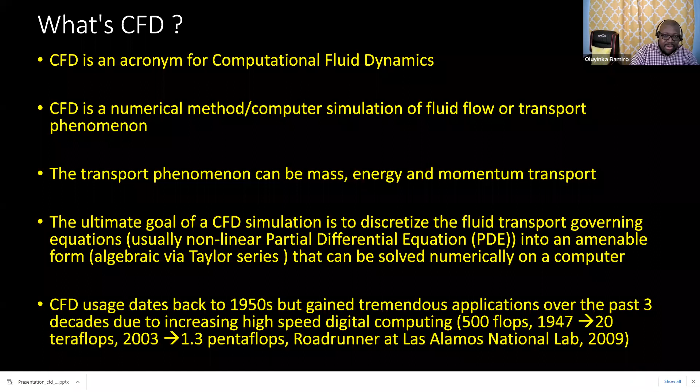So going to the fundamentals of CFD as a whole, basically there are 2 approaches to modeling fluid models. There's what they call a molecular approach, and there's what they call a continuum approach. In a molecular approach, the mean free path, what they mean by mean free path is the distance of collision between particles, is comparable to the length scale of the geometry you're interested in.

And in cases like that is when you look at flows in microchannels. Like, for example, if you look at printers, most of the ink flows are in microchannels. So in those cases, you most likely are going to use a molecular approach if it goes to that level, because at that level, what we call the continuum hypothesis or the continuum models breaks down.

But just to break it down, in this talk I'll be talking about the continuum model with regards to the Navier-Stokes equation. The Euler equation is just a derivative of the Navier-Stokes equation. Looking at the Navier-Stokes equation, in simple terms you can say it's a conservation of your mass, conservation of your momentum, second Newton's law, F equals ma, but in an elegant fashion, that's the second set of equations. The third one, you can say energy can neither be created nor destroyed, conservation of energy. You have this third partial differential equation.

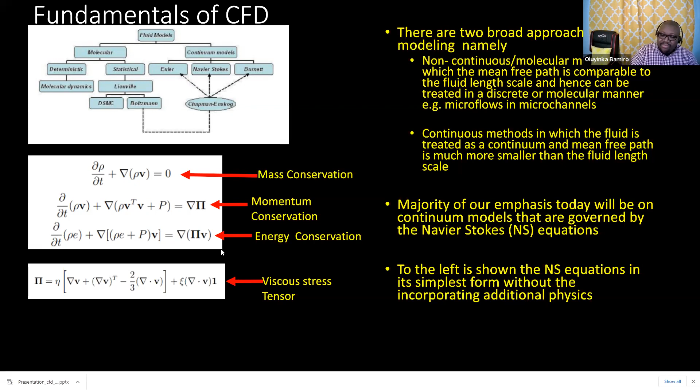Later on, I'll talk about what additional physics or complexity you can add to these equations and how you solve them. Now, going to the typical physics, like I mentioned earlier on, with regards to trying to solve your Navier-Stokes or computational fluid dynamics, this is by no means exhaustive. There are still many underlying physics that you can capture and solve. Later on, I'll begin to show you what this means, the practical applications. So in terms of heat transfer, it can handle conduction, convection, radiation, either separately or all combined, all happening at the same time. For radiation, it can be in a non-participating media or a participating media.

What do I mean by participating media? A participating media is a media that absorbs radiation, reflects radiation, scatters radiation. An example from my previous work is when you look at glass. When you melt glass, it reflects...

And then here I'm just showing different ways of modeling it depending on how optically thick the glass is, just different approximations.

And if you could remember from our basic fluid mechanics, we have laminar, we have turbulence, you can handle that. And under turbulence, it can be what they call RANS, Reynolds Averaged Navier-Stokes. It can be LES, Large Eddy Simulation, or what they call DNS. This is typically of little interest in industrial applications because it's computationally expensive to do.

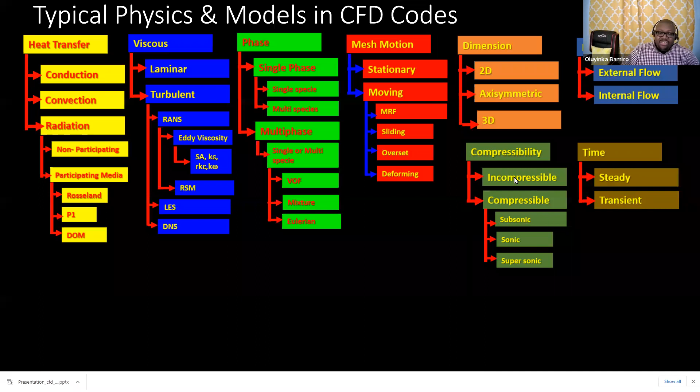And then in terms of time, you can solve a steady state solution - you're interested in the long-term perspective of the flow field, as opposed to just how things evolve with time. If you are interested in how things evolve with time, you look at a transient simulation.

Moving on to advantages of CFD as a whole, why CFD has a very good advantage over experimental methods: it allows for what I call design synthesis and optimization in a very cost-effective manner.

This means that before you even build a single prototype, you can run through different design alternatives and optimize the design to get the most cost-efficient design before you even produce it. But if you were to do that experimentally, you'd first have to build the prototype, run the design of experiments, and then see which one is your best design.

But all of this you can do virtually via CFD and come up with the optimum design, and in certain cases run your design of experiments, get response surfaces, and even take it into other models and so on.

Another area it's very useful is if you're interested in looking at your flow field, trying to see how things flow, it's very easy to visualize. As they typically say, a picture or a movie says more than a thousand words can say. So it's great for visualization.

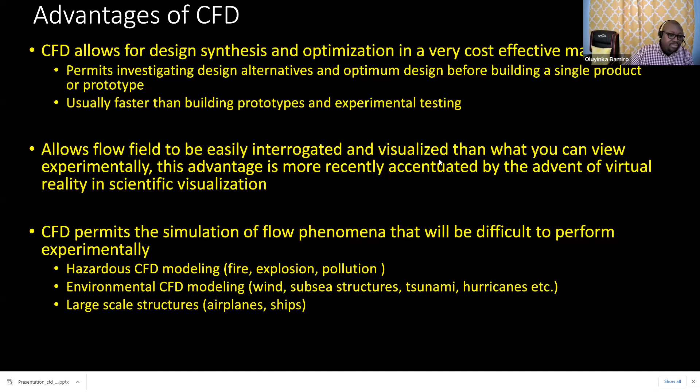Now I'll give some typical industrial applications of CFD, and by no means is this exhaustive - the application is wide, so I'll just go through some of it.

In the automotive industry, people use it for drag coefficient, since your drag coefficient affects your fuel economy. People look at cabin comfort - how the HVAC spreads uniformly once you put on the AC within your car. People also look at engine combustion and the overall thermal management of your car to make sure everything is at the right temperature.

In aerospace, it's almost similar to the automotive industry: drag and lift, airfoil design, cabin comfort.

In the biomedical device industry, they use it for all sorts of biomedical devices - as long as fluid flows through them, it can be simulated to optimize the design, such as flows in blood vessels and the heart.

In power and energy: turbine design, cooling towers, combustion, burner design, etc.

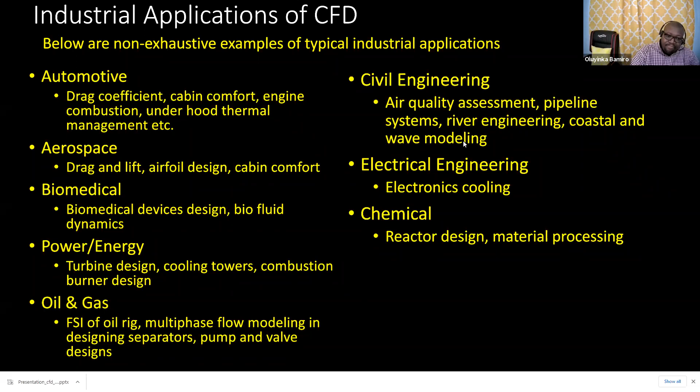Moving on to the stages of a CFD simulation. Like I mentioned earlier, there's what they call a pre-processing stage, where you're basically trying to clean up. Somebody's going to give you a CAD geometry. Let's say, for example, on the car here, one of the demos I'll show, they give you this 1964 Aston Martin DB5, and they want to calculate the drag coefficient on it.

So once you're given this geometry, most geometries of industrial relevance are usually complex. From a CFD analyst's point of view, we always say it's not watertight. Typically, if you're trying to solve something, particularly for internal flows, you want to make sure it doesn't leak, that it's watertight. So you go through the process of cleaning up the geometry. In terms of the CFD analyst's time, most of it is spent at this stage trying to get it ready to be simulation-ready.

The CAD geometry can be received in native format, like if you work with SolidWorks, NX, CATIA, or Autodesk, it can be in their native format. It can also be in a neutral format, like STEP, IGS, Parasolid, or in tessellated formats, and so on and so forth.

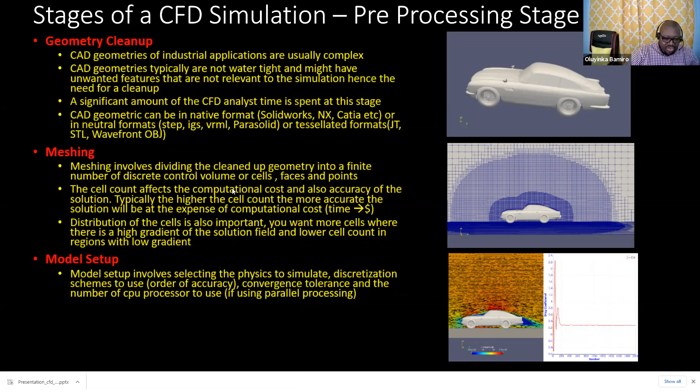Then moving on to the solution stage, it's pretty much simple. Just submit the job to your compute server, on which you're going to run the job. And usually in most industrial applications, you typically use parallel processing, use supercomputers, or more recently, people have started using GPUs, graphics processing units, to speed up the simulation.

The analyst time is barely minimal here, but where most of the cost is induced at this stage is basically your infrastructure cost, in terms of do you rent a compute server, or do you have an in-house compute server, or things like that. That's where most of the cost is, more infrastructural cost.

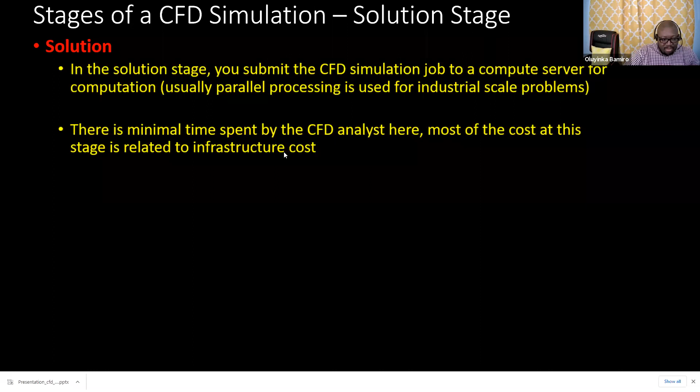And then the post-processing stage typically involves analyzing the results that you've generated into some meaningful data sets, in which you make a value-based engineering decision. We typically don't just run CFD analysis for running sake. You want to answer questions from an industrial perspective, usually to either design safer products or to have cost-effective products. Like engineers, we solve problems. So CFD in itself is trying to solve a problem, answer a question.

And that's why I always talk about value-based engineering. It must bring value in terms of the product delivery or in terms of costs. That's at the end of the day. This typically involves generating contour plots, animation movies, graphs, and reports. And like I mentioned earlier, trying to make those solid value-based decisions based on your analysis involves good engineering judgment by the analyst.

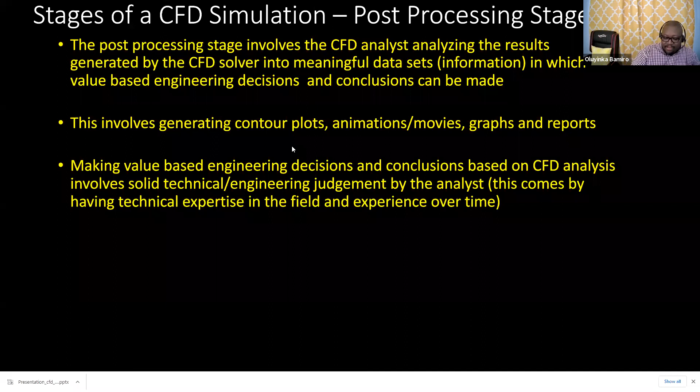But more recently, there have been some game changers, at least on the solver side, like OpenFOAM, which is what I'll be showing today. That's why I see value and potential for people adopting it, particularly in the developing world, in cases like Nigeria, where the cost of ownership of some of this is very expensive. But they have solvers that are good enough to do what this does. The only downside of open source is that the learning curve is very, very steep. It takes a long while to get a handle of things for open source versions.

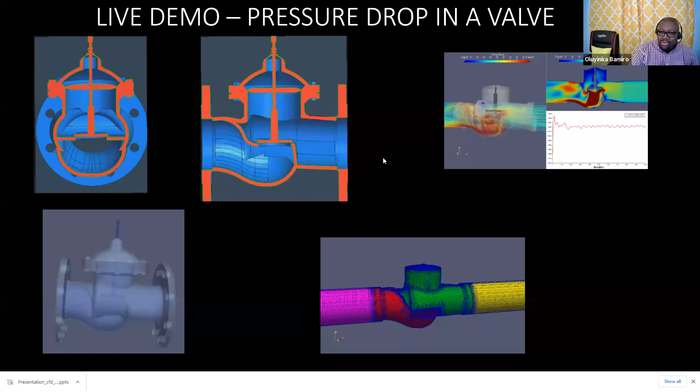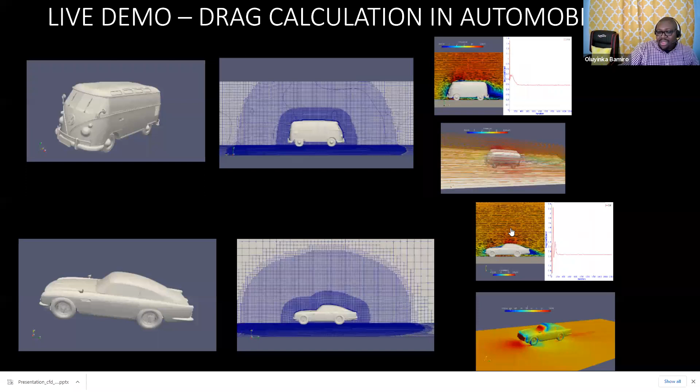Moving on to the second one, this is an example of a Volkswagen bus where I calculated the drag coefficients, and similarly for an Aston Martin, comparing its drag coefficient to that of the Volkswagen bus. The other one has to do with a transient simulation.

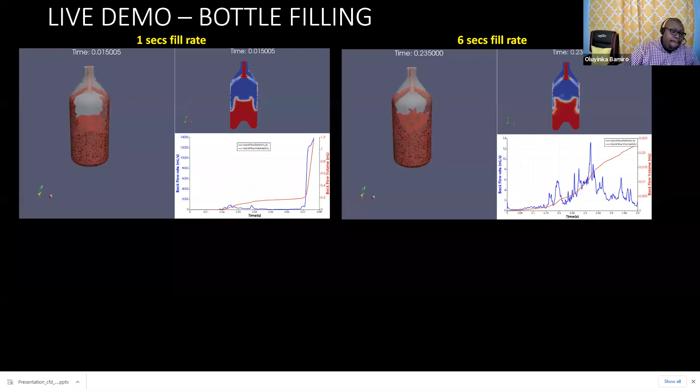It shows a bottle filling. Typically in a bottling plant, time means money, and you want to fill the bottle as fast as you can without whatever you're filling coming out. So you're looking at a 1 second fill rate, a 6 second fill rate, and the amount of backflow you get.

So I'll show that, and then I think that should be it. Hello, am I still on track? Yes, very much, yes. Go on. Okay, so like I mentioned earlier on, please go on.

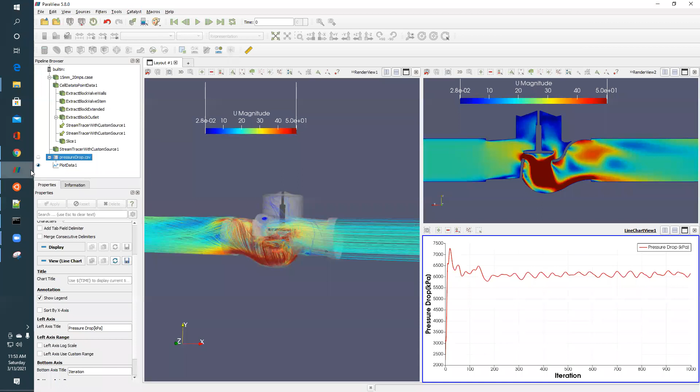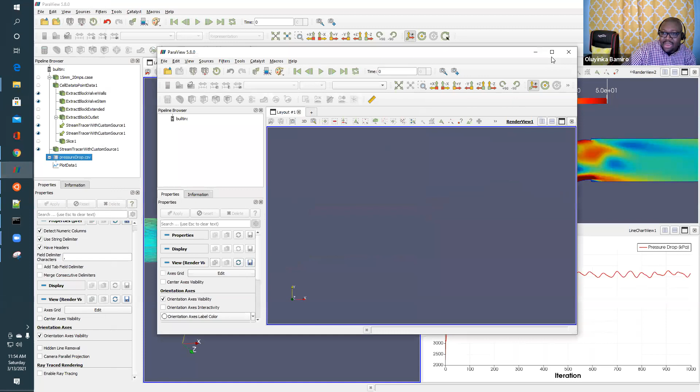Okay, like I mentioned earlier on, this is a case where you are looking at a valve, and you are interested in determining, as you solve iteratively, what your pressure drop is going to be. In typical applications, to start out with, you are given the geometry. Let me load it.

Let me open something. By the way, for this case I was using OpenFOAM — it's open source and freely available. So in this case I created the geometry, which, like I mentioned earlier, is in STL format. Let me load it in just to show you the geometry.

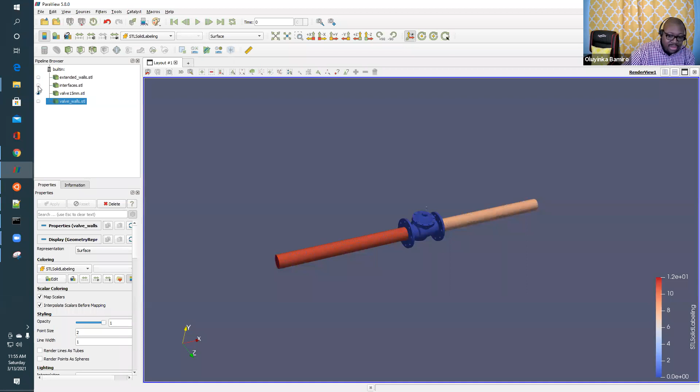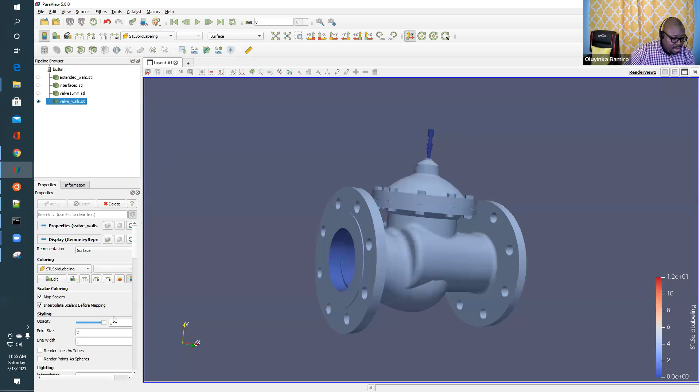So this shows the valve. Let me switch off the extended walls. You are given a valve like this, and the flow direction is from my right to my left. Let me reduce the opacity here, and the flow is going to go in here depending on the valve position.

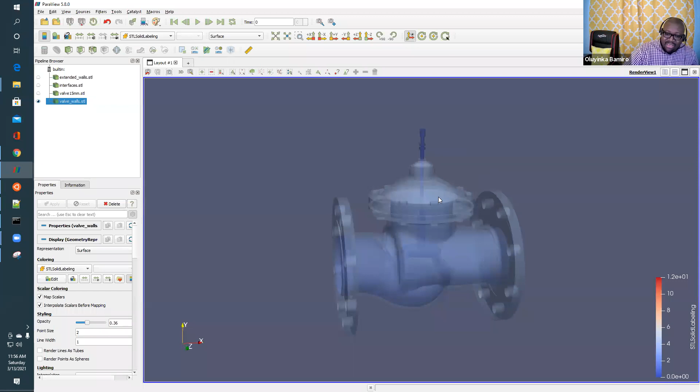You are going to have different levels of restriction, so you can generate your pressure drop curve for different valve opening positions. This one was at 15 mm from the seats. When you try to solve something like this, like how you would do it experimentally, you're going to have what they call an entrance length.

You extend it — you have your flow coming here. You don't just start the flow here because you want it to be fully developed, like it would be, for example, in an oil pipeline. So I extended the domain upstream of it, and then downstream of it.

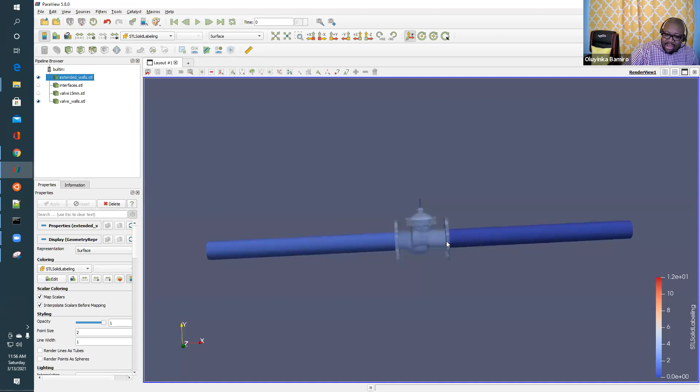In my analysis, I look at the total pressure downstream — you surface average the total pressure, and the difference gives you your pressure drop at different flow rates. By total pressure I mean both the static pressure, the hydrodynamic pressure, and also the pressure due to height changes. After that, you mesh it.

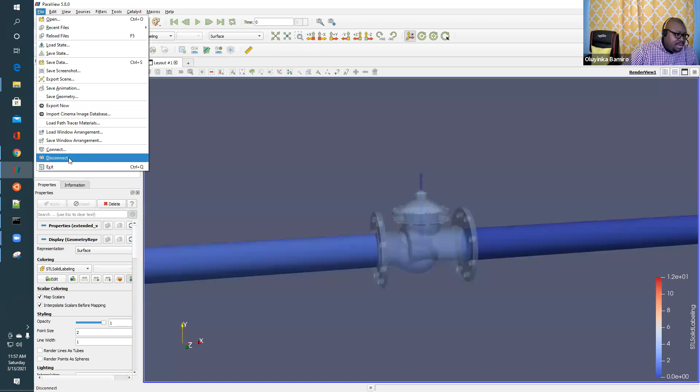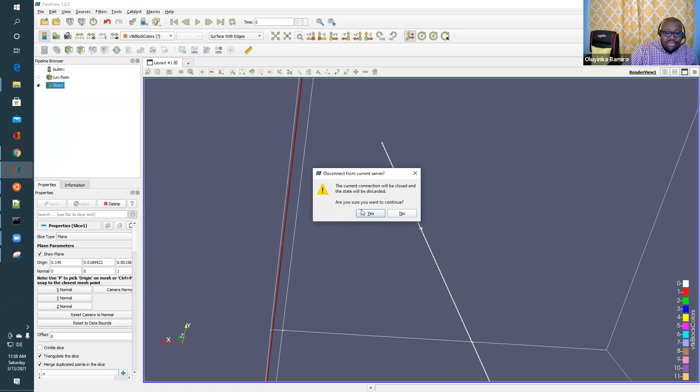So let me show you an example of how a mesh will look like. Let me disconnect this and see whether I have a state saved. Okay, I don't think I have a state saved. Just a minute, let me try to load the mesh.

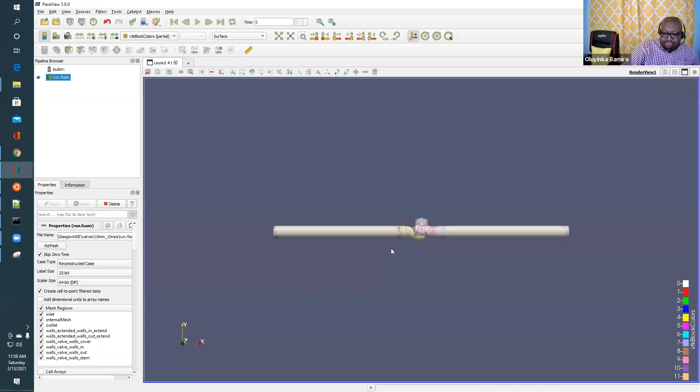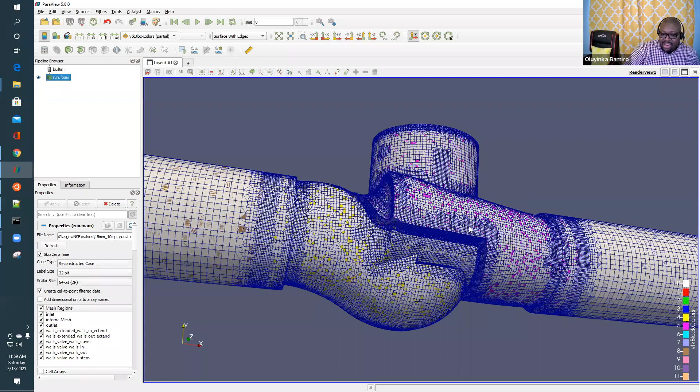So after doing that geometry, this is what your typical mesh will be, discretizing it into cells like I mentioned earlier. Typically you are interested in the regions that interface with the liquid, so as shown here, it shows the regions that are actually in contact with the fluid region.

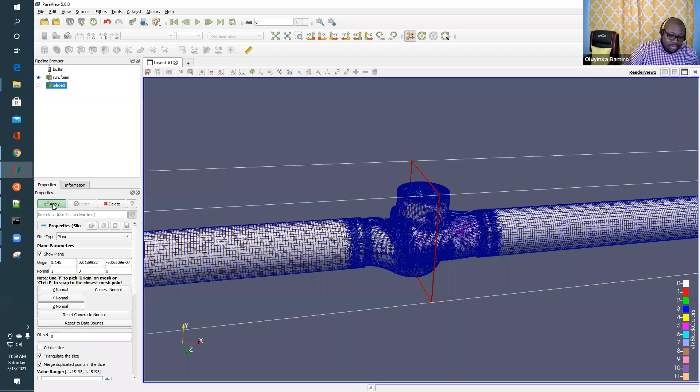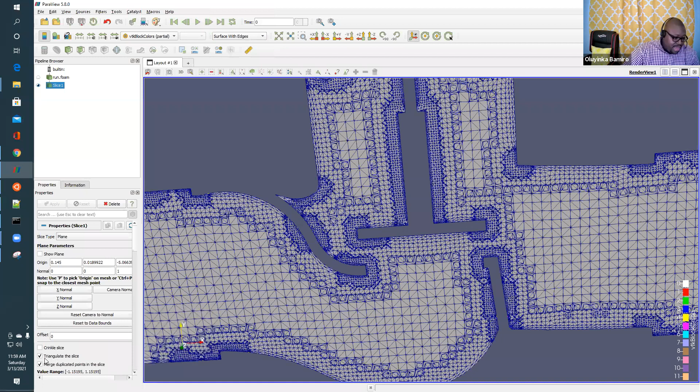If I take a section cut of the mesh — just a minute, so my Z normal — this gives you a section cut, and you can get an idea of how the mesh looks like and how the meshing operation works.

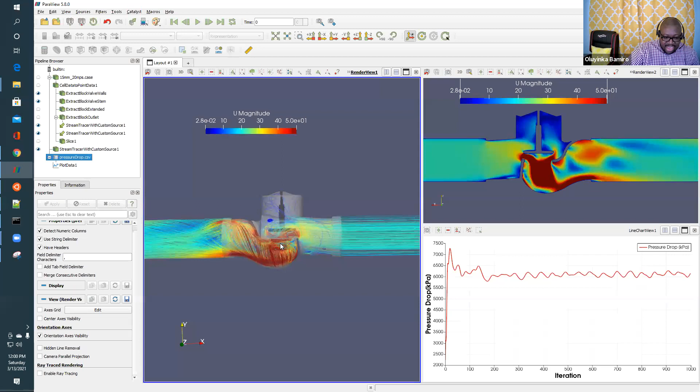Then when you go to the result phase, what I'm looking at here is the streamlines, how the flow goes under the seat, showing that because of the gap here you have high velocity regions coming up and going there.

On the right here is a section cut at mid-plane, showing the flow in the valve. It's not shown here, but it's cut such a way that you won't see it. It comes this way and then goes underneath and then goes out.

And then here is what I look at, my pressure drop. Typically you can use this as a convergence criteria. You run it long enough that you feel it's stabilized, and then you can take your pressure drop as the solver iteration continues. This is a very huge amount of pressure drop because there's a huge amount of flow going there.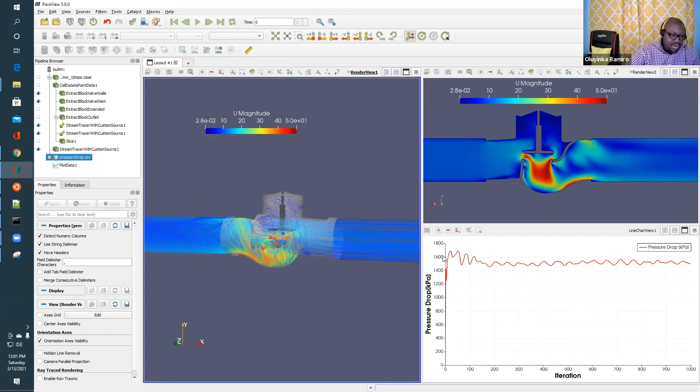Similarly, without being redundant, the initial one I was showing was roughly 20 meters per second flow velocity going in from the inlet, and now I reduced it to 10 meters per second. You see the pressure drop is like 1600 compared to my initial one, which was 6500. And here, if you look at it, I reduced it to 5 meters per second.

You see the pressure drop is way much lower. So definitely, as you'd expect from a physical and intuitive point of view, the more flow rate you put through, the more your pressure drop, and from a practical aspect, the more it's going to cost you in terms of the type of pump you'll need to overcome that pressure drop. So if you look at it in terms of pipeline engineering, that's how you come up at times with sizing of

pumps, or is there a way that we can better optimize this valve so that we can get a certain flow rate for that design. Those are kind of design considerations you take into cognizance when you do things like that.

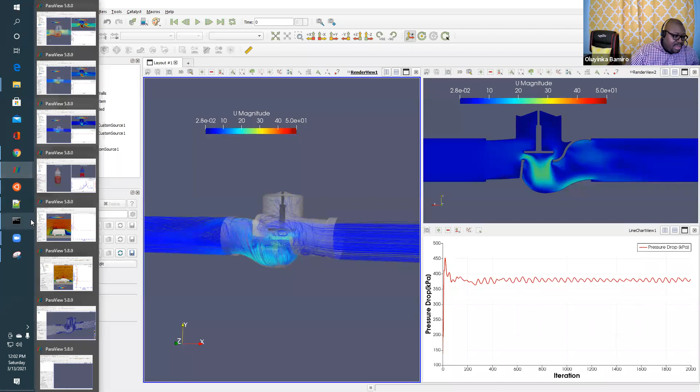Moving on to the next one that I'll talk about has to do with, let's say for example, looking at a bus like this. Why drag coefficient? Because drag coefficient typically affects your fuel consumption. So typically you set up a model like this.

Let me show you what you typically get. What you typically get, maybe you get a geometry. Let me go to my constant. You get a geometry like this, and then while it loads, okay.

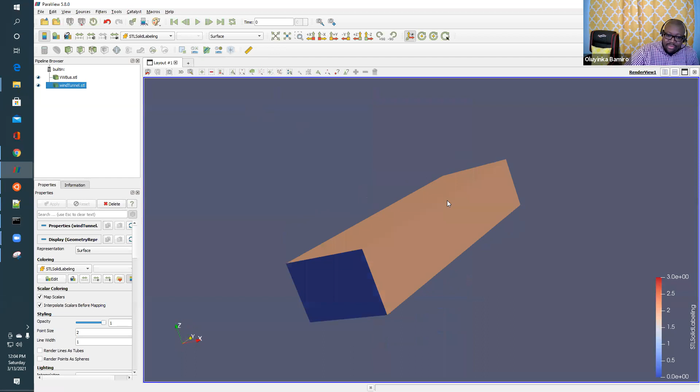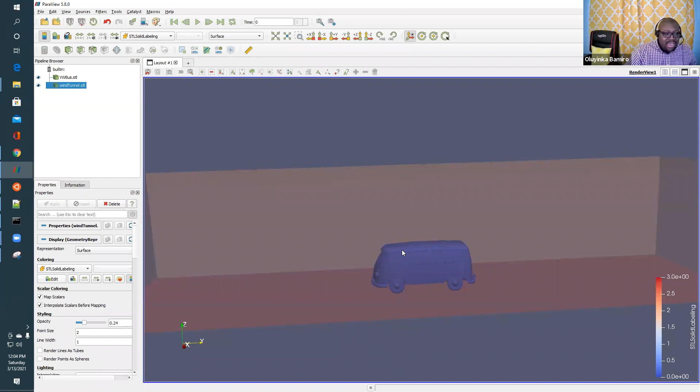So here you get a geometry like the bus, or it can be any car of interest that you're trying to do, and this by no means is limited to just cars only. For example, even in sports, people look at design of golf balls, it's basically the same principle. People look at swimmers, when people design swimsuits and all those other things, it's still the same underlying physics. You're trying to calculate drag coefficient there. The application is limited in certain cases only by your imagination, so there's a lot of areas you can apply this.

But for the context I'm presenting here, you're looking at a bus and trying to calculate the drag on it. Typically, the bus is moving at a certain speed. From a CFD perspective, you don't just move it at that speed - you can try and move it at a corresponding speed, but you still get the same results by keeping it still and assuming there's a flow going over it.

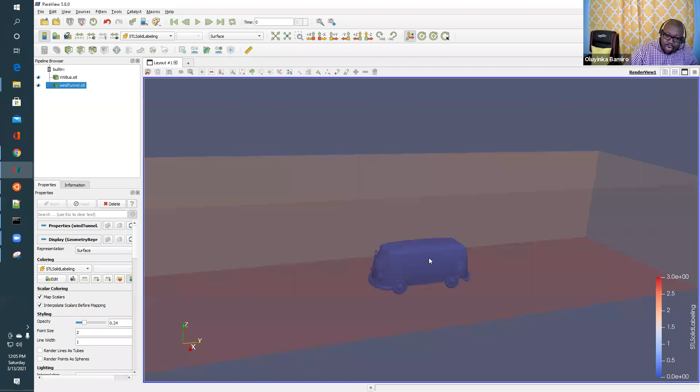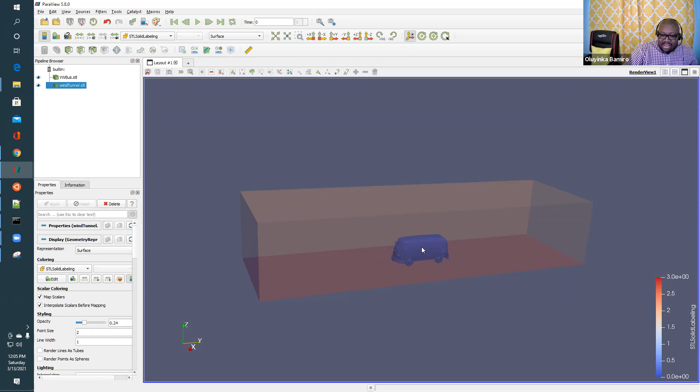And that's what I've typically done here. In most applications, you put it in what they call a wind tunnel, and then you send in flow at a certain speed and calculate the drag coefficient. Basically, that drag coefficient at the end of the day relates to the friction force, and that loss affects gas mileage and so on. In terms of physics, it's just an external airflow. If you're interested in internal airflow, there are cases where you look at cabin comfort within the car, like I mentioned earlier on.

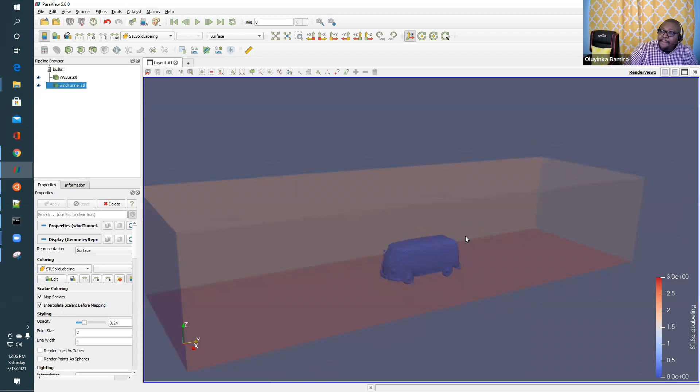So this shows you the geometry. I have a wind tunnel and so on and so forth. Then you follow the same procedure like I mentioned earlier on. At the end of the day, mesh it, look at the mesh, like I showed in my presentation here, just a minute.

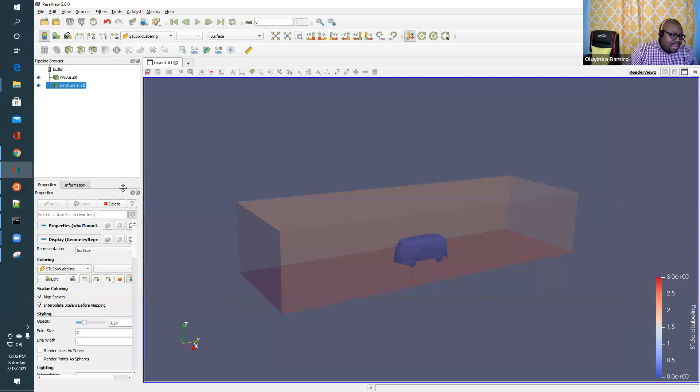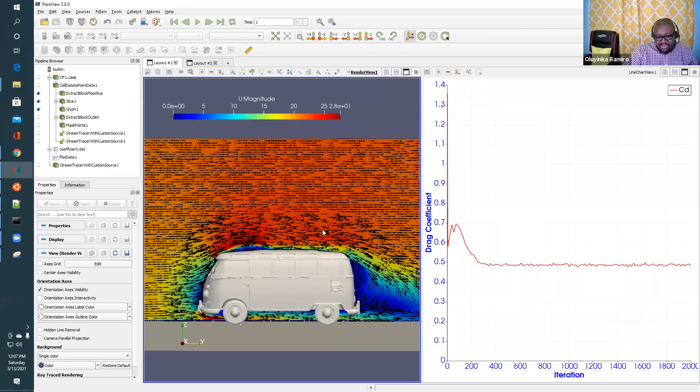When you look at the mesh here, this region is well refined, well distributed. As I move further out, the distribution reduces. At the end of the day, you look at the drag coefficient - the higher the drag coefficient, the more friction forces, the more gas mileage will be affected. So looking at this bus, the drag coefficient is roughly around 0.48.

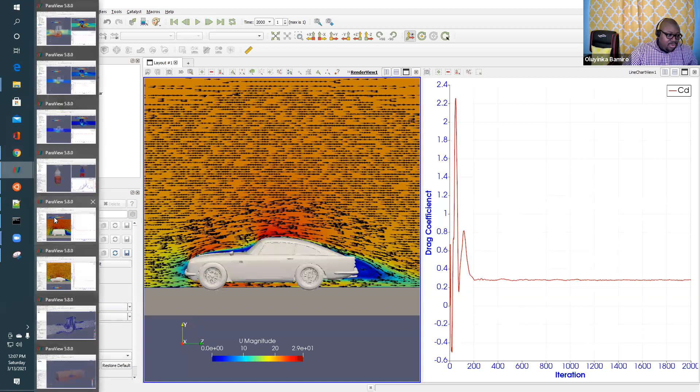If you compare that to the sports car I was showing, like the Aston Martin, the drag coefficient for that was roughly around 0.29. So you can see, because the body of the Aston Martin is shaped such that there is less drag, it's contoured, it's streamlined.

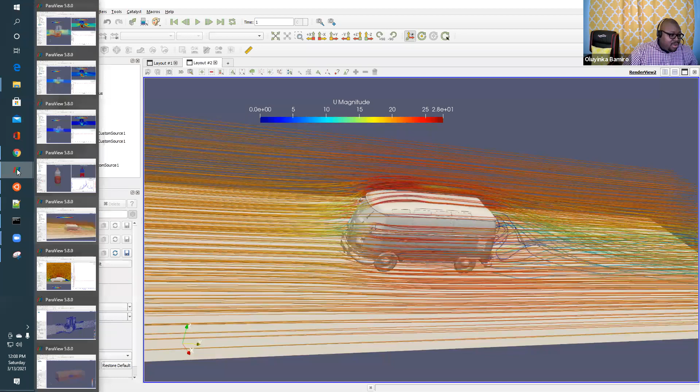That leads to less drag, as opposed to when you compare it to something like this, where you have a lot of surface area for the flow to hit, a lot of drag. Then we can look at things like streamlines, the recirculating flow, and all sorts of things you can do. Moving on to one more application, like I mentioned earlier.

The application here is, let's say, in a bottling plant, where they want to see how fast they can fill, because how fast you can fill determines your job rates and how many bottles you can fill. The faster you can fill, the more cost efficient you are.

So basically you're trying to push the limit. Can I fill this bottle, like a wine bottle, within a second? If I can't fill it in a second, can I fill it in 2? Can I fill it in 3? So you look at different designs, like when I started with this, even different designs of these nozzles, all sorts of things you can do with that.

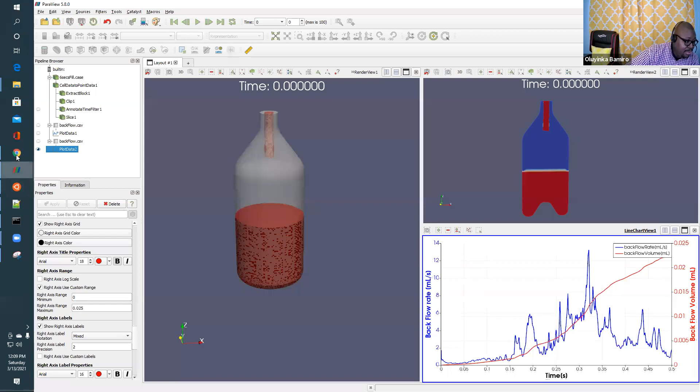On this axis here, we show you how much backflow you have, in terms of how much of it is going out in total as you fill. Here the blue shows you the flow rate, the instantaneous flow rate. There are different applications of this in different industries, not just limited to bottle filling.

In this bottle filling example, if I show you the animation here, on the left-hand side they're trying to fill as fast as they can. This is roughly around 740 ml, trying to fill it within 1 second. As you can see, once you start filling, because of the air entrainment, it circulates up, and then everything spills out, almost 1.2 ml, within a very short period of time.

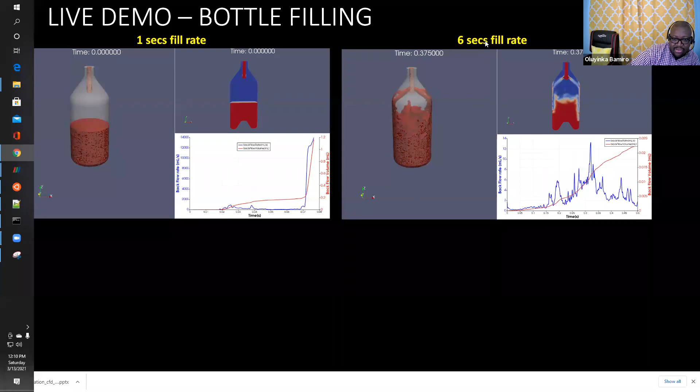If you try and reduce the fill rate in this case to roughly 6 seconds, it shows you a normal fill rate, filling normally, even up to 0.5 seconds, and still no backflow.

This basically can drive a lot of solution strategies. Even in this case, you're assuming a constant fill rate, but you can do a control system whereby you use variable fill rates. Maybe once the level is here, you fill at a certain flow rate, and as it's coming up, you reduce your flow rate. So all the kind of design decisions you can make based on the power of using CFD.

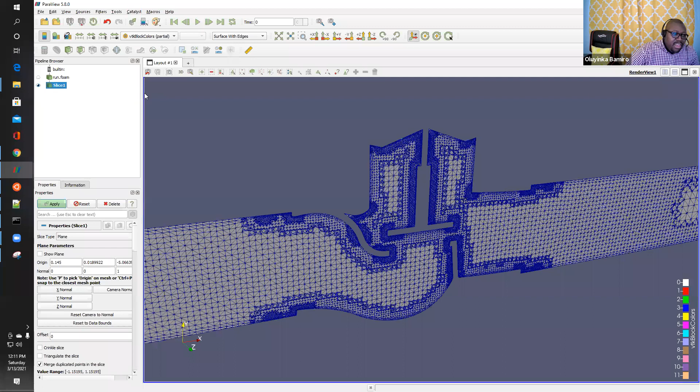One more area, just before I go back to the presentation, that I want to share is in the area of HVAC design. Let me disconnect this.

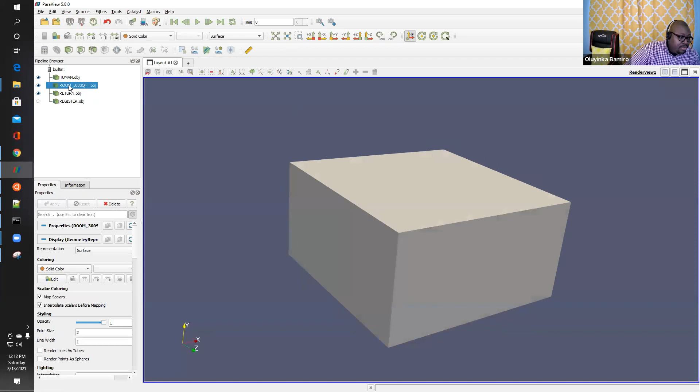This one typically shows you what people can do in terms of HVAC design. Take, for example, you are in a room, trying to design a central air conditioning system. This one I don't have the results for yet, but I'm working on that.

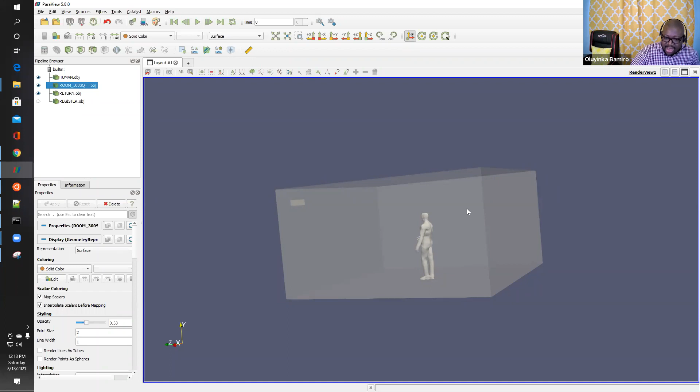This is just for a typical room. You can scale it up to looking at a whole building, looking at airflow patterns, which areas are dead zones, what areas don't heat uniformly. Within the landscape of this room, you can look at a typical US sized room, I think it's 300 square foot by 300.

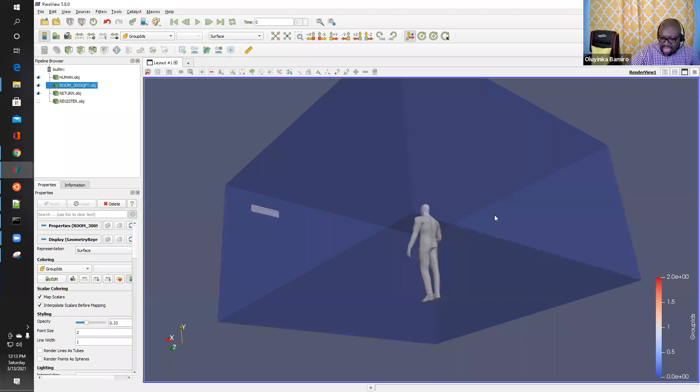If you look at it, typically in the States they have a register that is tiny here, whereby you introduce your airflow field, and then your return register is going to be somewhere here. So if you look at it, the flow comes through a louvered blade, goes this way, and then goes out that way, and then you look at the flow patterns.

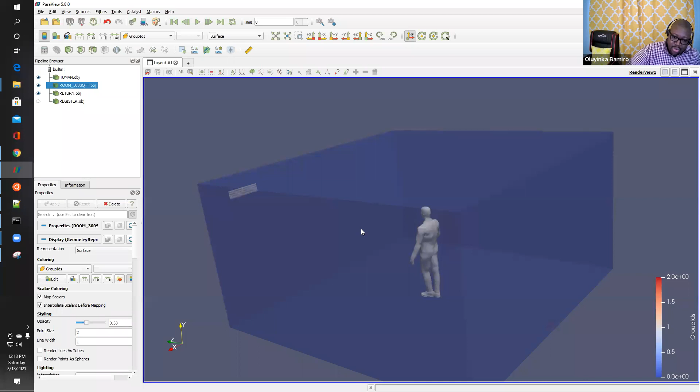There are metrics that you look at, like the mean age of air in the room, how long does the air stay there. More recently, people look at particle modeling, like for example you have a human model here, and if you zoom in, you can release particles from the nose or from everywhere.

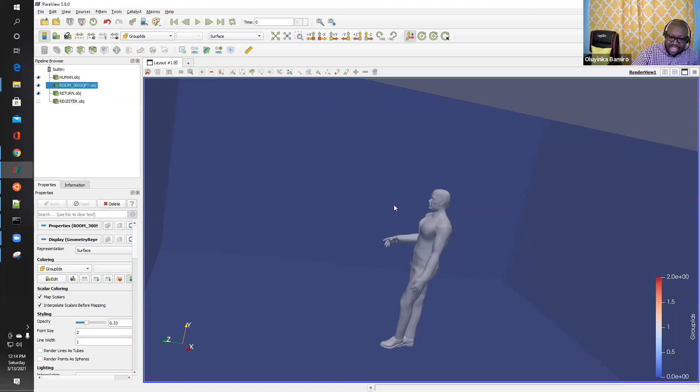And then just to simulate, for example, in this era of COVID, how long does it take for those particles to stay in this room? Assuming your HVAC is working and you're sucking air out of that room, how long does it take those particles to stay? If you have 2-3 individuals here, how long does it take? And what does that practically mean for you as an engineer?

You can now begin to look at where can you optimize those registers, inlet registers, outlet registers, how much flow should you put in, and things like that. A lot of areas that people are exploring and trying to look at things like this.

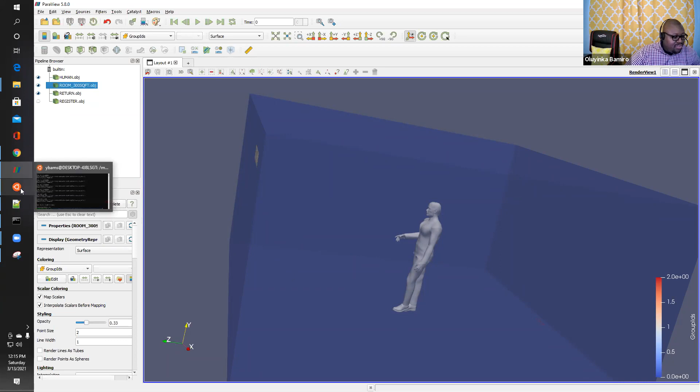Thank you very, very much, Dr. Bamiro, for this exceptional presentation. I think you have taken us through something that is like a crash course, a practicum, a lecture, all wrapped in one, and bang on time, very spot on, encompassing practical applications. You've ignited the interest of very many of us, and given project and research ideas to so many other people. This I find is very insightful, very engaging, educational, informative. For me, this is a very great one, and I think everyone shares my sentiments. We would have done a very thunderous round of applause, but I don't know how we'll do that virtually. But just to appreciate the presentation, thank you so much for this.

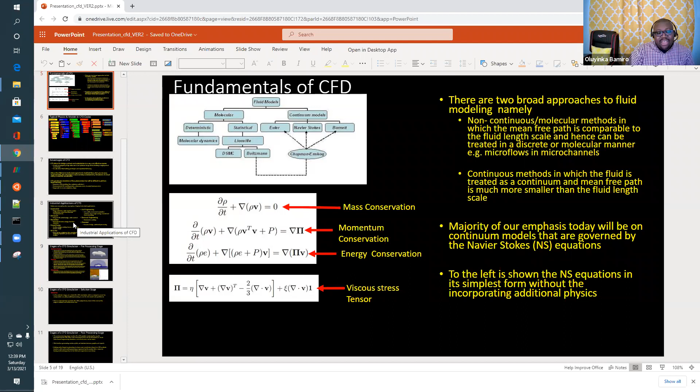Okay, so in terms of exporting a model from the software you mentioned, I've never used it before, so I really can't talk about what you're going to export or whatever. But I'll talk about it from a general physics point of view. Let's say, for example, what you're talking about is what they call fluid structural interaction, FSI.

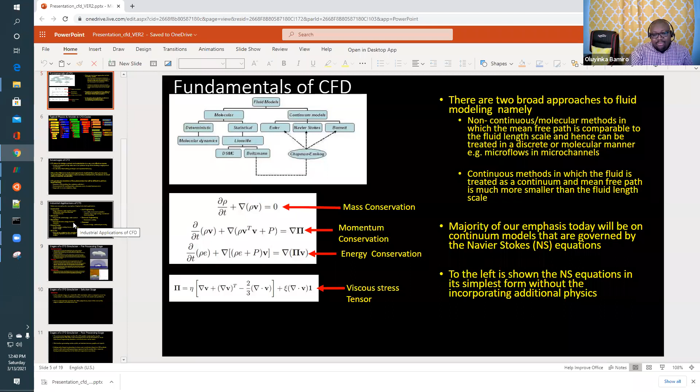Once your fluid structure deforms, what the fluid structure is going to send back into the fluid solver is going to be your displacement and your velocity. Now the displacement and velocity go back to what I talked about here. You see your domain here is deforming now. So your domain at this instant in time is going to deform, and then you have to remesh a little bit and continue solving your CFD.

And then the CFD, again based on the deformed mesh, will deform, and then you solve the flow field, you map the flow field back, and it goes back and forth like that. And in that context, that's what they call fluid structural interaction, that is a two-way coupling. That means the deformation of the structure at times affects the flow field, and you go back and forth.

So that's a two-way coupling. And there are certain cases where you try just a one-way coupling, maybe just the fluid pressure, you map it to the structural solver and solve it once. You don't go back and forth. But going back and forth is very accurate, but expensive, because first of all you are solving a transient problem, and secondly your mesh is deforming, so you have to be remeshing and then going back and forth like that.

People do it. I've had applications where I've done that before, and it's part of my PhD, I looked at that too. So there are cases whereby you look at that, but there are cases whereby it's just a one-way coupling that is good.

For example, when you look at sloshing in a tank and you're hitting the walls, depending on how rigid those walls are, it doesn't deform that much. If it doesn't deform that much and you're interested in noise, then in that case a one-way coupling, just map the pressure field and solve the noise generated based on the vibration of the structure, because the displacement of the structure itself is very minimal relative to the flow, disturbing the flow field.

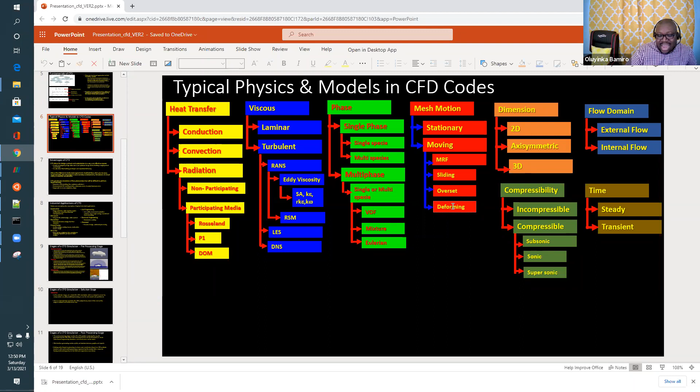For us to be relevant—myself, and the nation as a whole—we must produce people that can contribute to the larger economy. I mean the larger economy in the sense of a global economy, the way things are right now. It's a global economy, let's say it's like a waterfall—people will go to where they can have value, where it's cheapest.

I think Nigeria has the potential to tap into it. We have the workforce, we have the capabilities, just making sure the infrastructure is in place and the engineers we are training have those relevant skill sets. For example, if people are doing numerical methods, it's good to do it on paper, but how does it apply? Use the software that people use in industry, that's relevant to them. I know some of that software is expensive, but now that gap has been bridged because there are open source alternatives as competent as commercial ones.

So that's my take on things. Always remember, if there's anything you get out of this lecture as it relates to Nigeria, remember it's value-based engineering—how can you add value to me as an organization, how can Nigeria add value to the global economy in this space as a whole? That's what people will look at.

And I don't believe it's about whether you're developing or developed. I've interacted with people in a similar scale to the state Nigeria is in, and part of it is because they have certain infrastructure in place, and secondly because their workforce, as they're being turned out, have skill sets relevant to the economy they're in. I think that's my take on things. Hopefully I answered that question.

Thank you very much. Very elaborate.